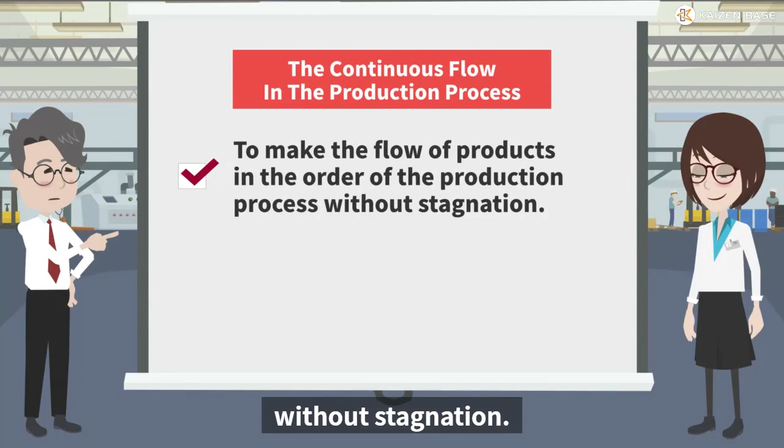Okay, I'm showing that. The continuous flow in the production process means to make the flow of products in the order of the production process without stagnation. It might be easier to understand that the continuous flow means the state where products move like flow. For example, as shown like this, each process exists independently. The state wherein process inventories are accumulating is not the state that products move like flow.

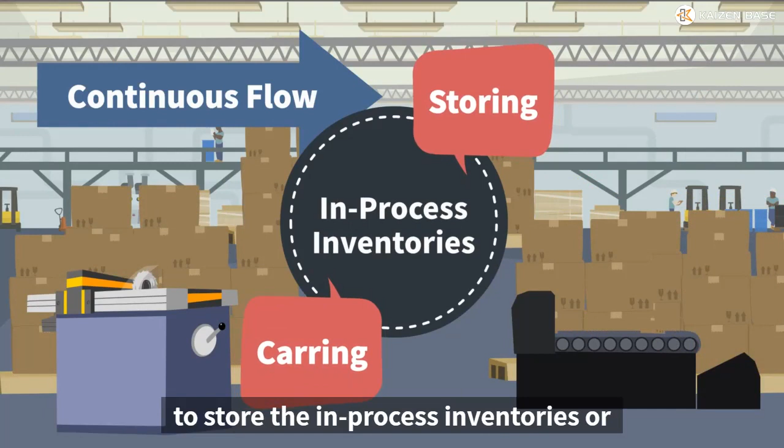Not like that, but, like this, it is essential to achieve the state where each process is connected to produce goods like flow. There will be no waste in the continuous flow in the production process to store the in-process inventories or to carry them. And the time between each process to complete the production, lead time, can be reduced considerably.

I see. The continuous flow in the production process means the idea to achieve the production to make goods one by one without stagnation like in flowing, though each process is separated. Oh, Mio. You said the very important key word. What? What was it? Did I say anything? Was it each process is separated? No. Well, without stagnation? No. Wasn't it one by one? Okay, I am explaining it.

In the continuous flow in the production process, in order to achieve the state that products move like flow, it is essential to make products in a narrow fast flow. In other words, it is not good to do in a wide flow. A wide flow means the way to make many products at a time and to carry them at once. In this way, the flow will break off many times.

For example, imagine a bucket brigade. It is to pass the same size buckets one after another and carry them to a fire. If not passing some buckets to the next one by leaving them, or giving some to the next one at a time, that will cause the wastes to make the buckets held on or carried later. Then the buckets will not be sent to the fire smoothly.

The continuous flow in the production process is the same idea. A narrow fast flow is better than a wide broken flow. That is, it is important to reduce the accumulation or the stagnation by the one-piece flow production or the small lot production. I see. Now I know that one by one was a relevant keyword. Now I can imagine the way of thinking to achieve the product stream smoothly in a narrow fast flow with a continuous flow in the production process.

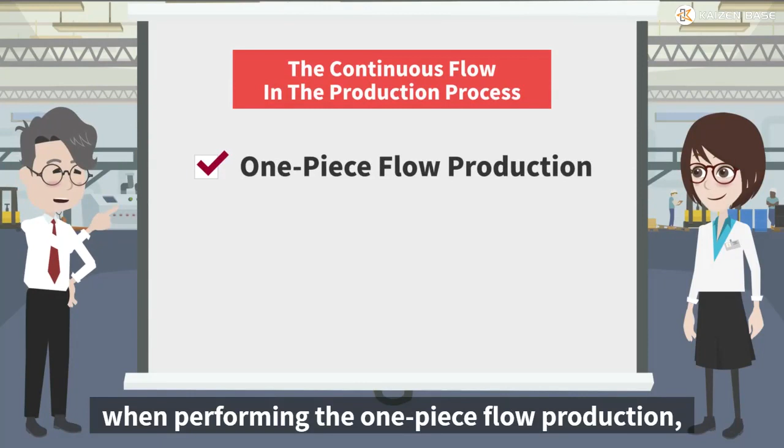I understand the concept, but it might not go well easily in the actual workplace. How do you feel? That's right. So, I'll explain the points you should pay attention to. As you feel, the continuous flow in the production process is easy to say but hard to do actually. For instance, when performing the one-piece flow production, it will not be achieved unless the operation's duration in each process is arranged well. Because in that situation, trying to perform the production makes more wastes instead.

If the duration is not arranged and the products are sent to the next process one by one, waiting will occur in the short duration process, or the operators will be hurried in the long duration process. Also, to make a narrow fast flow, it is required to stream something while arranging the flow. To arrange the flow means to make the flow arranged without the stagnation. For example, in a disordered flow like this, the stagnation will occur. So the narrow fast flow can't be made. It should be changed to a flow without accumulating like this.

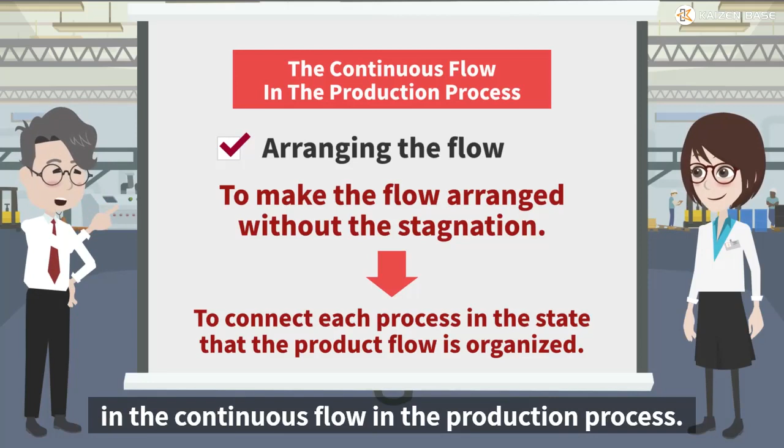That is, to arrange the flow is to connect each process in the state that the product flow is organized by considering which route should be selected. It is a critical task in the continuous flow in the production process. In the continuous flow in the production process, it is important to improve every single operation. It is also essential to work to improve the operations in the whole factory, including the flow of the goods between the processes. Not an individual optimization, you should try to achieve the overall optimization to improve the processes.

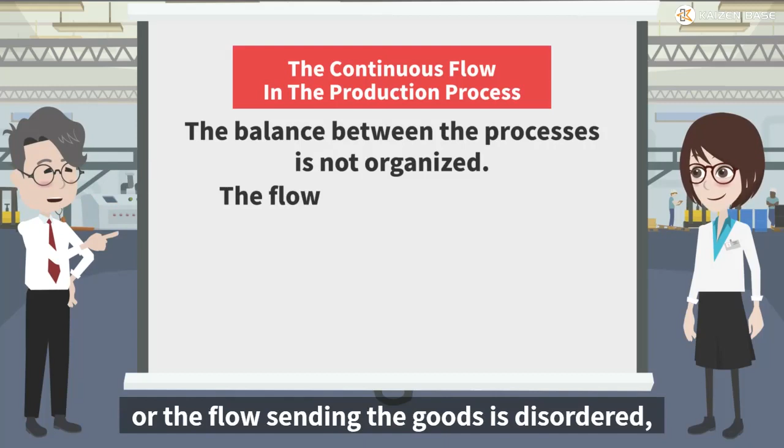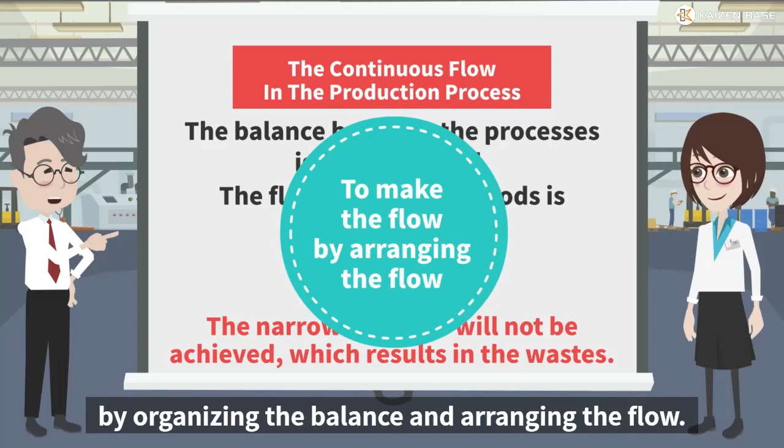Besides, 3 more important keywords are given: bottleneck, line balance, synchronization. I will give you homework about them till next time. But today, you should remember that if the balance between the processes is not organized or the flow sending the goods is disordered, the narrow fast flow will not be achieved, which results in the wastes. And, you should also remember that it is important to make the flow by organizing the balance and arranging the flow. I understand that. I will certainly remember that.

I will research the keywords: bottleneck, line balance, synchronization. By the way, these 3 are different ideas? Now I'm not telling the answer. Try to research first.

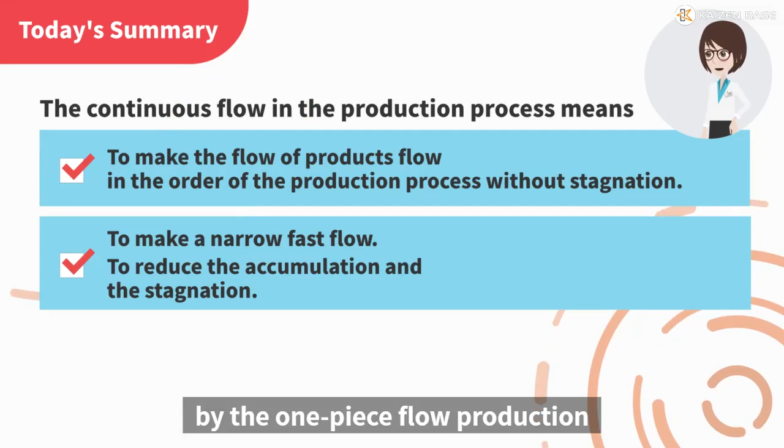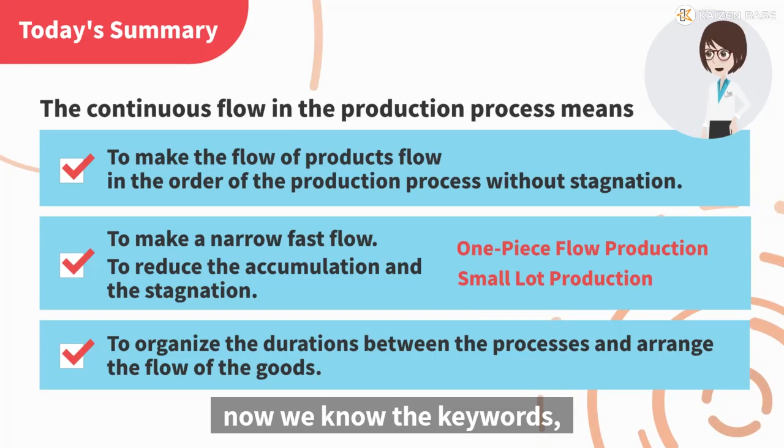Now, we make a summary of today's lecture. The continuous flow in the production process means to make the flow of products flow in the order of the production process without stagnation. It is the point to make a narrow fast flow, not to make a wide broken flow. To achieve the flow, it is important to reduce the accumulation and the stagnation by the one-piece flow production or the small lot production. It is also important to organize the durations between the processes and arrange the flow of the goods. In addition, now we know the keywords: bottleneck, line balance, synchronization.